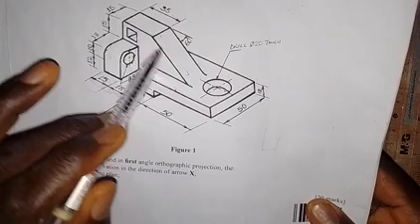By the time we are looking at this object in this direction, we are going to see a rectangle which is down here. We see this rectangle, this hole will be hidden, and then this is going to give us a rectangle. So this hole here will be hidden, and then we are going to see this. So let's go and see how this can be done.

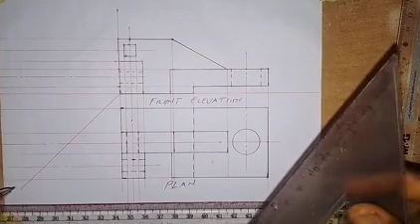What we are to do is to take our 45 degree set square, and then we set it at this point on the front elevation. Then we draw this inclined line like this. I'm just going to draw from here. So we draw a vertical line from this point here, it goes up. Then we draw a vertical line from this point here, it goes up from here.

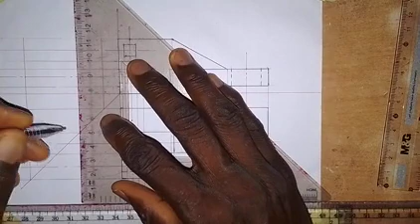Now the next thing I'm going to do is that for this part that we have here, which is this rectangle, as it's going to be shown in the end elevation, so I will draw a vertical line from here, and then I will also come to this point here. So we'll draw a vertical line. Now let's bring out the part that we can see. So we are going to see a rectangle along this part, so we start from here to here. So this is the top of that rectangle.

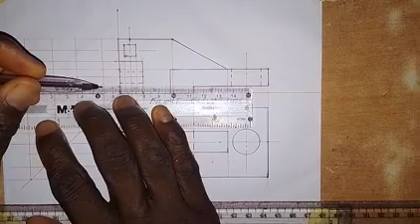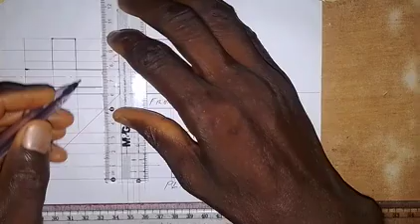So then for this rectangle that we see on this surface, we also make this a horizontal line. Then for this part that we see here as a rectangle, so from here down, and from here down, and then we make this a thick line. So we have this. This line also, we also need to make this line a thick line down, and then we come here also, so we make this a thick line down.

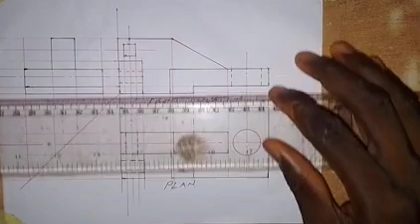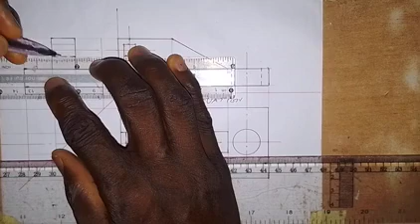So then the next thing that we have here, this square hole will be hidden in the end elevation. Let's quickly work on that. So from here, we are going to draw a horizontal line here, and here we draw a horizontal line at this point. So the hole will be hidden from us in the end elevation. We have to make this line short dashes for hidden details. So we have done this, and for this also, for hidden details.

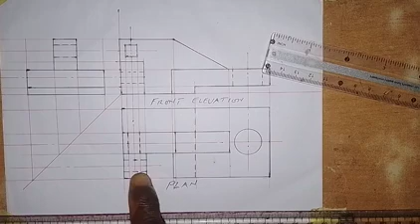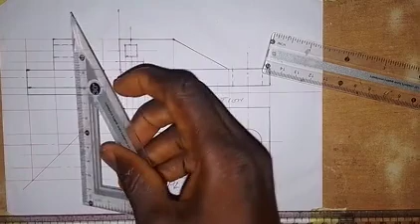So what other thing do we have to show here? For this hole that we have here, that is going to be shown, we are going to see it as a hole in the end elevation. It's going to be around here. So if I follow this line, this is its center. Let me draw a vertical center line up here to get its center in the end elevation. So we have it like this.

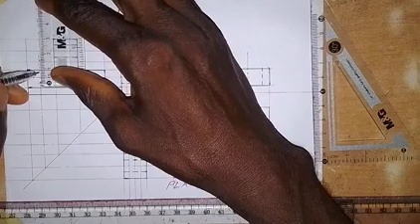So the diameter is 8, so the radius is 4. I may need to use my hand to create that hole. So what I'm going to do is to take a measurement of 4 millimeters to this side, then 4 millimeters to this side. Then coming up here, we take 4 millimeters down, 4 millimeters down, and 4 millimeters up. So we create a square.

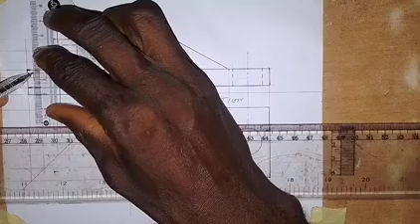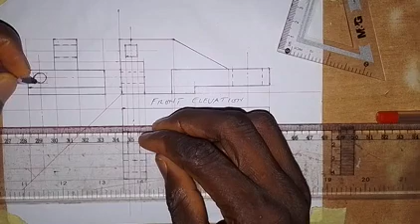This is the square. So I'll now use my hand to make that hole, or circle. The circle may not be perfect, but I'll try. Alright, so this is how it should be here. We have it like that.

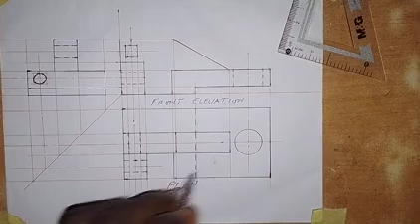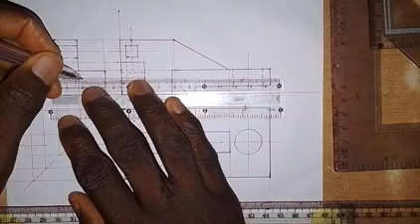What else do we have to show here? So we have to show this along this part. This is its center, so let's get its center drawn in the end elevation. We follow this, and this is its center line. We have to draw it to be hidden in the end elevation. So we draw a vertical center line here to get its midpoint. So this is it. Then we take, we have 10, 10 from the center to this side and 10 to this side. So then we draw it as hidden detail, using short dashes line to show that hole is hidden. Then we also draw for this.

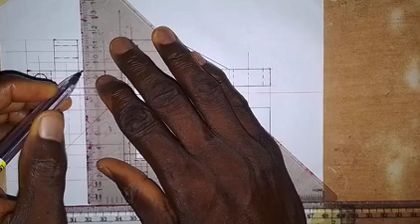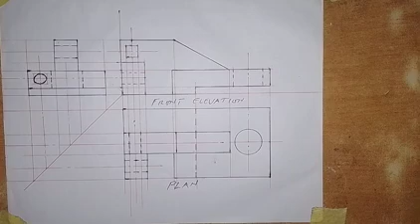Alright, so that part is done. So what else do we have to show here in the end elevation? I think we have put all in place. So except this part, there's something that this part is hidden, and we also have to show it here in the end elevation.

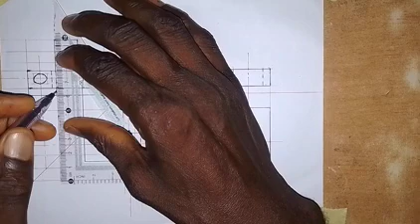So this line that we have here, let me see it. Is it this one? So we need to make a short dashes line all through from here, since it is hidden. So that's it, alright. So this is how the end elevation looks.